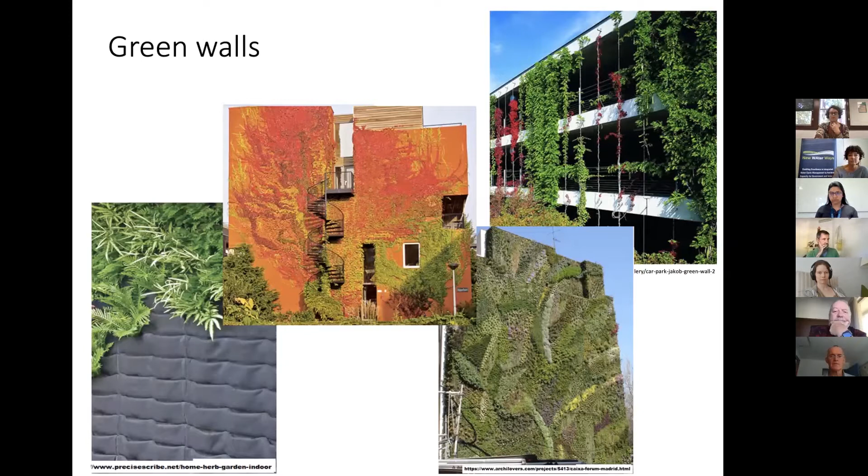And then there's a question of, can we irrigate them with greywater? So the overriding, outstanding questions that were given to us when we started this project were: how well do green walls survive in a Mediterranean climate, and can we irrigate them with greywater?

If we're aiming to implement them here, irrigating green walls with greywater, what is the appropriate media? What are suitable species of plants? What's a suitable design? Some of the images I just showed you were actually attached to the building wall, and some were not attached, like in the photograph shown here. So what's the best design?

What are the irrigation requirements? What are the water requirements of the plants? What's their ability to remove pollutants that might be in the greywater? What are the maintenance costs, and can we reuse the outflow? Is there sufficient volume and water quality to have some beneficial use for the outflows, or is it better to have no outflows at all? So there are some questions there.

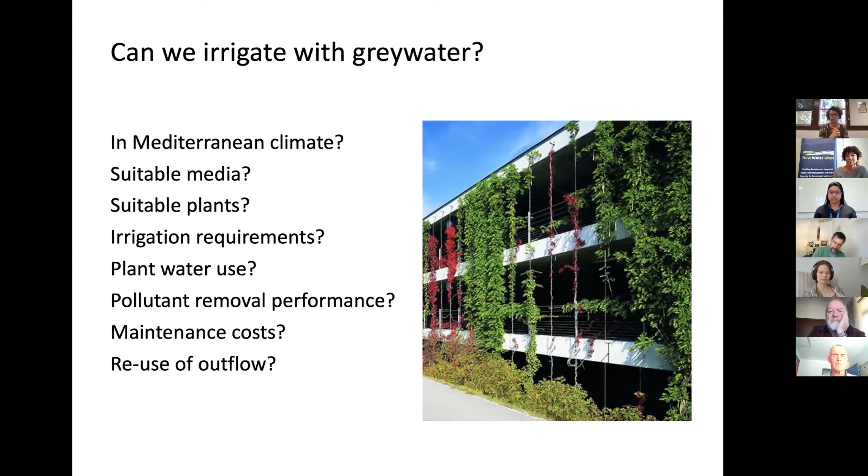Azrina and Reza, today we don't have a lot of time, so they will touch on some of these. We don't have time to go over all of them today. In addition to the design and water use of green walls, there are also some key questions around thermal comfort.

What is the temperature reduction behind the planters or behind the green walls? Are the green walls simply providing shade that could maybe be provided by shade cloth, or is the plant somehow intrinsically important here? What's the benefit of them?

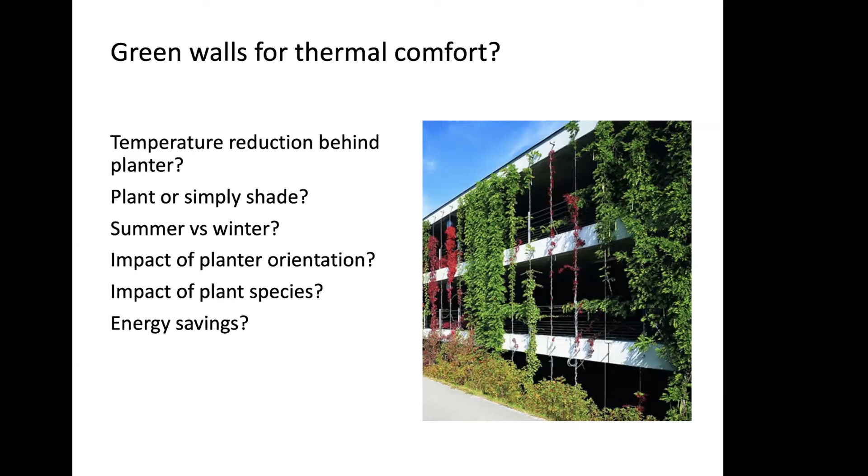What's the effect of green walls in summer versus winter on temperature benefit and thermal comfort? Is there an impact of planter orientation, meaning east facing, west facing, north or south facing? Do different species provide different thermal comfort, and what's the energy savings? So we have here a project that really spans between water and energy, and these green walls have the potential to integrate across both of those.

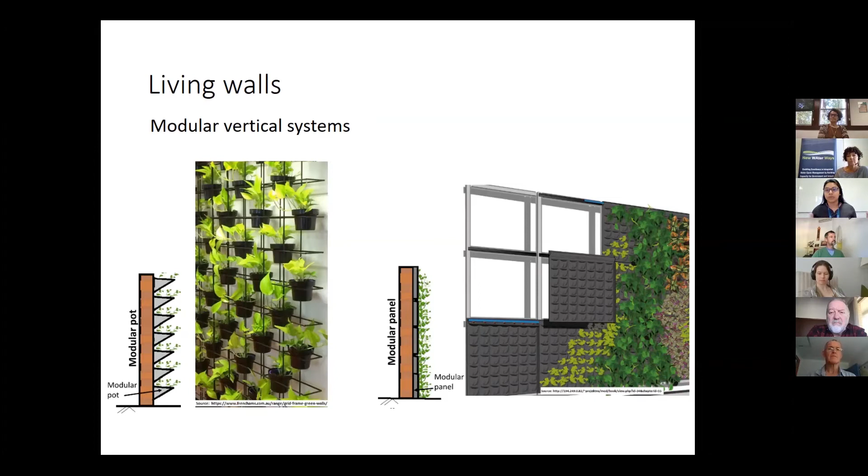Living walls are modular vertical systems where the plants are rooted on the wall itself with the help of modular pots or modular panel systems. For our project, because we need a subsurface irrigation system due to the greywater, I think the best option is the green facades.

Within green facades, there are two types: attached green facades and detached green facades. The difference is that when plants are rooted on the ground and attach themselves to the building wall, it's called attached green facades. If it uses the help of trellises or other support systems, it's called detached green facades.

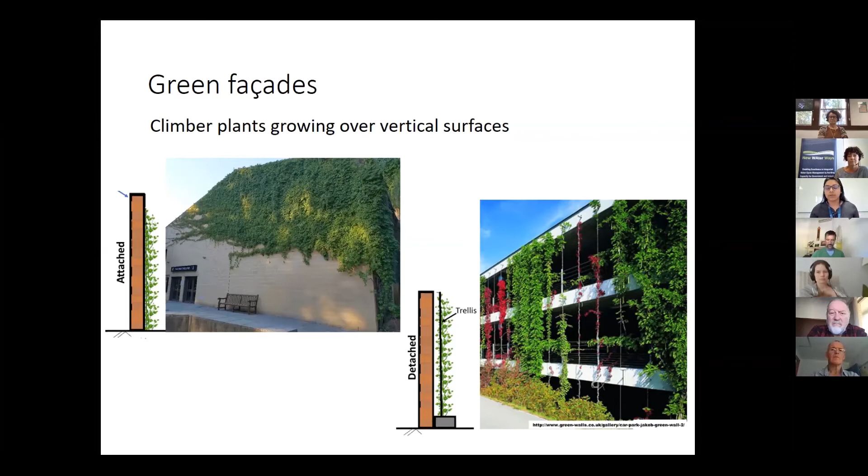Our project is about the detached green facade system. Because of the water use and the subsurface irrigation, we chose the detached green facade system.

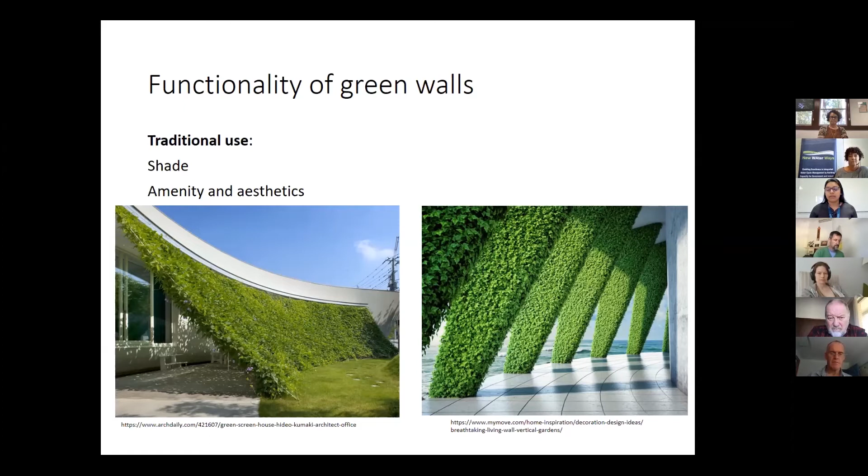Green facades or green walls in general have traditionally been used for providing shade, aesthetics, and amenity. The functional understanding of their usage is for their thermal benefits.

There is also research on green facades or green walls assessing their performance as air purifiers, their passive acoustic insulation, and their role in increasing biodiversity.

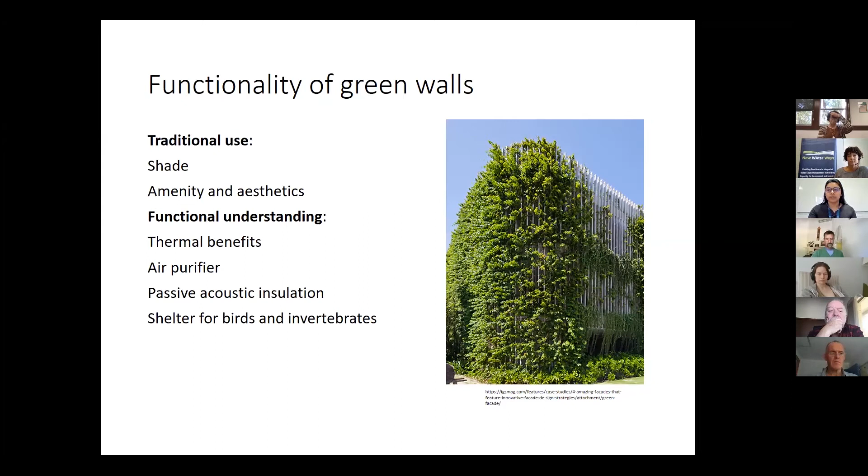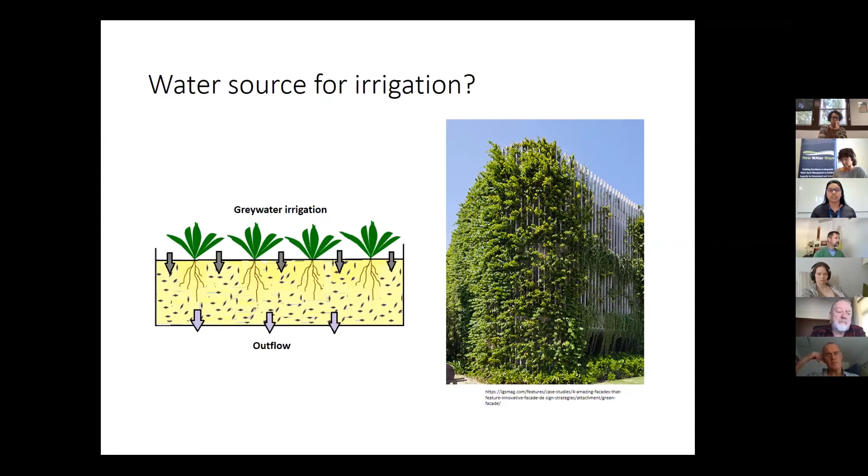But there is only a little research going on about their water pollutant removal performance. So the question here is: if we implement the green facade or green walls, what could be the potential water source? Because for plants to survive, they need water, and we have a shortage of clean water. So the question is, can we use a different water source, like greywater, because it's light wastewater in nature?

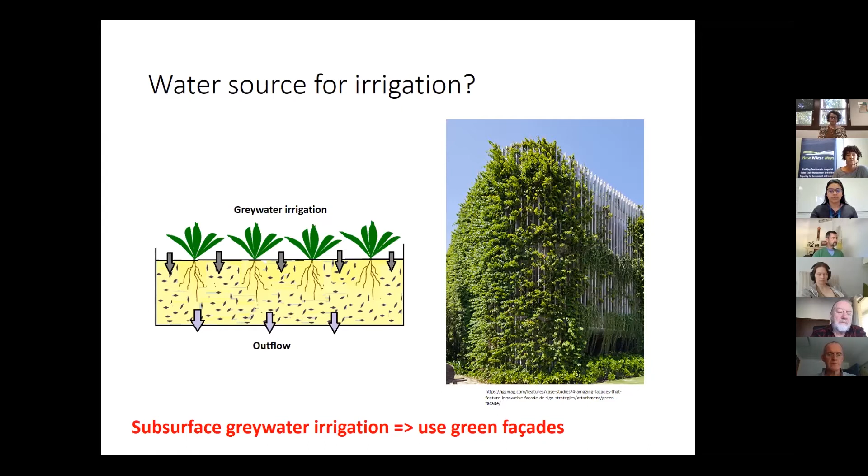So the question is, if we use that as subsurface irrigation, can we use it for green facade irrigation? Only a few studies exist on green facades irrigated with greywater. At Monash University in Melbourne, there's research on a laboratory-scale green facade that showed excellent nutrient removal performance—about 80 to 90% removal of total nitrogen, biochemical oxygen demand, and total suspended solids. But the media in that system was maintained at a water-saturated level, and Melbourne has a different, temperate climate, which differs from here in Perth.

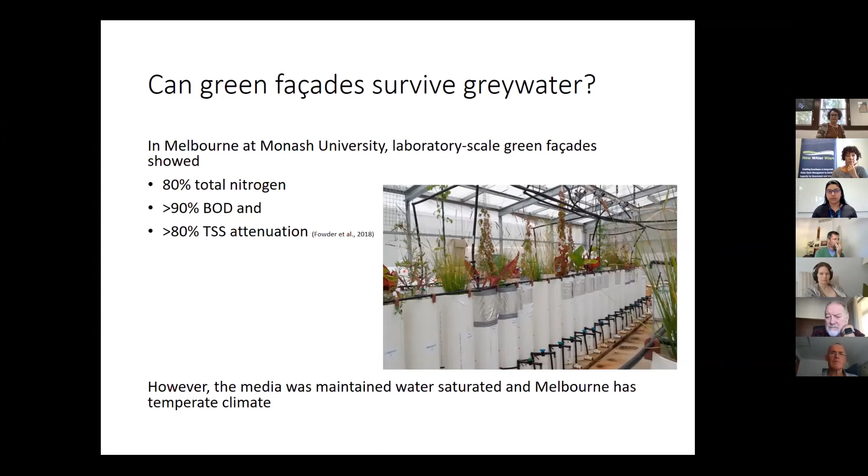So we have different knowledge gaps or questions: if we make this green facade system at a large scale outside the laboratory, can we maintain the water-saturated level? And can the plants survive in a Mediterranean climate, which has a hot, dry summer and a wet winter?

What could be a suitable media for the plants and the suitable plant species for this system if we want to implement it? Also, the seasonal water requirement—how we treat irrigation in summer versus winter, and how the plant will use the water. Also, if we have outflow generated from the green facade, how are we going to use it, or whether we want to use it at all. And lastly, the pollutant removal performance and the ongoing maintenance cost.

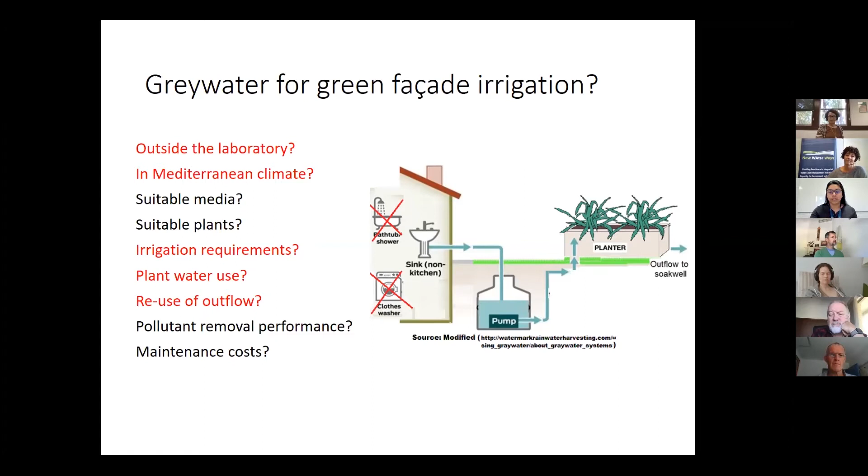We have all of these questions, and I'm still working on answering them. But for today, I'm just going to focus on the water performance of the green facade. As Shelley mentioned, this is the Bentley Primary School.

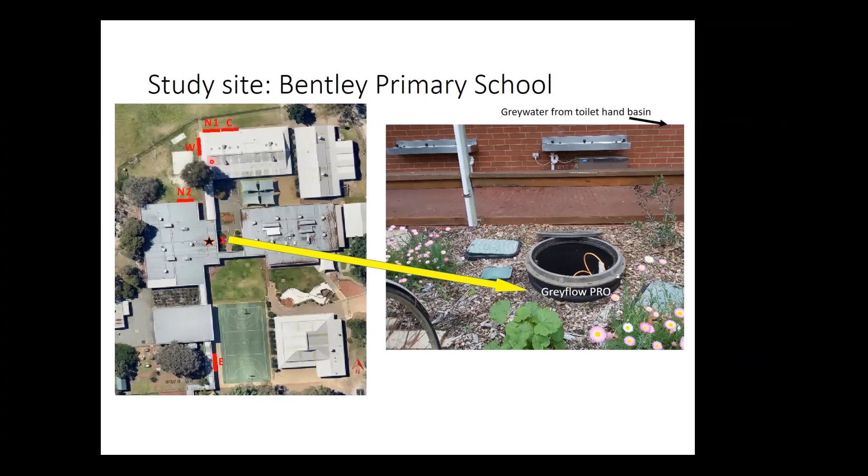These 5 red bars are showing the green facades. We have 4 green facades with plants and media, and 1 control with only the soil media, but no plant, to check how the plants are performing.

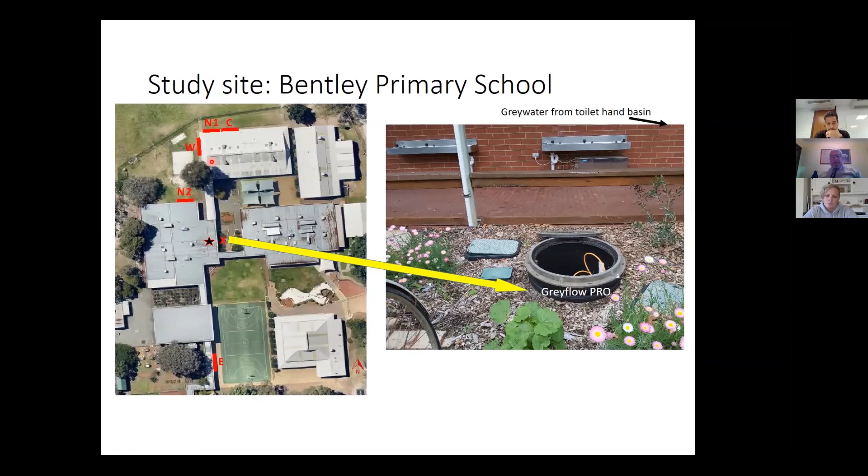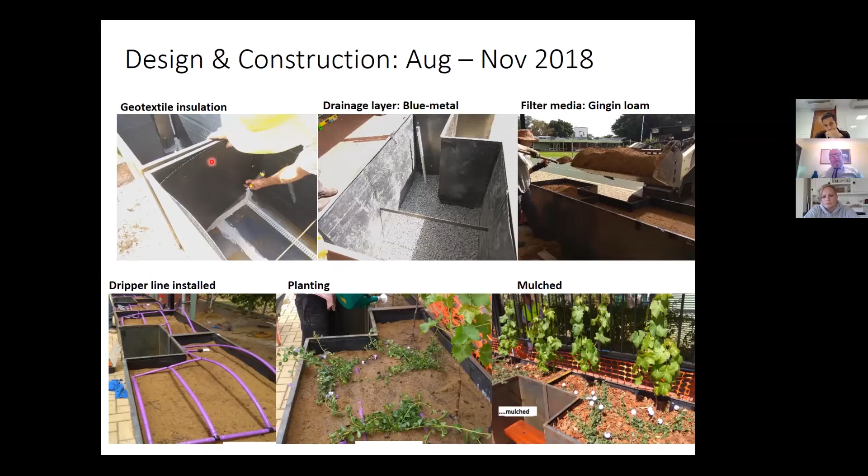Then we use Gingin loam as the growth media. We have drip lines for subsurface irrigation. We plant and then mulch to reduce the soil evaporation.

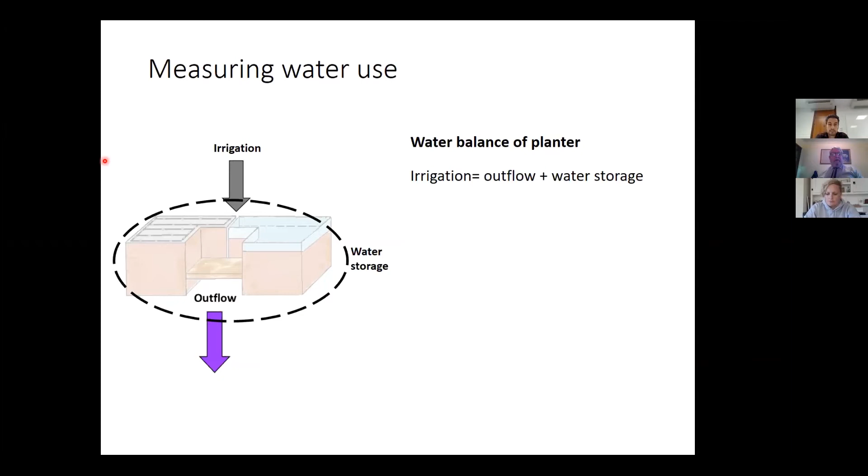So the water use, in terms of the application of the green facade, if we want to do this in real life - for the water use, I divide this in the water balance equation of the planter, which shows that when we put water as irrigation, we have outflow, and then the remaining water would be called the water storage. The water storage is stored in the soil water, and the plant can then use that as evapotranspiration - that evaporation from the soil and the transpiration from the plants.

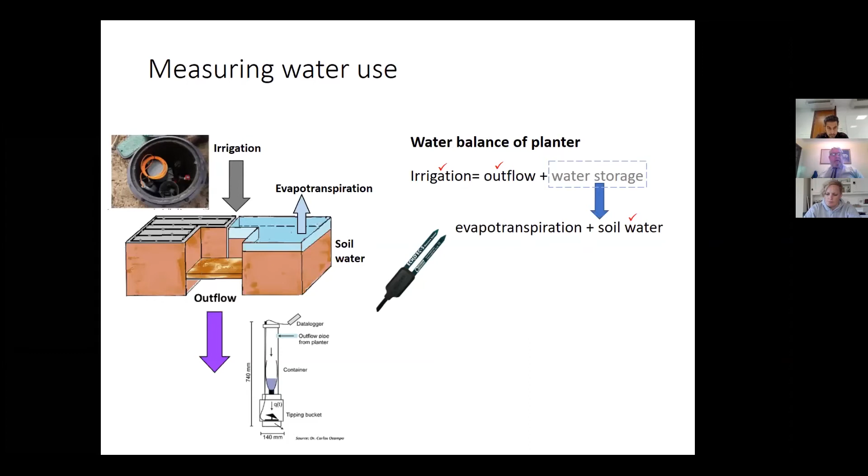We have measured this, we have been measuring this. The irrigation is measured with the help of a pressure sensor inside the greywater pump.

We have outflow, and this was designed by Dr. Carlos Ocampo, with the help of a tipping bucket rain gauge, because sometimes there is no outflow, and sometimes there is 500 milliliter outflow per hour. So this huge fluctuating outflow cannot be measured with any commercial device, that's why we had to go with this hybrid technology.

And then the soil water is measured with the soil moisture sensors.

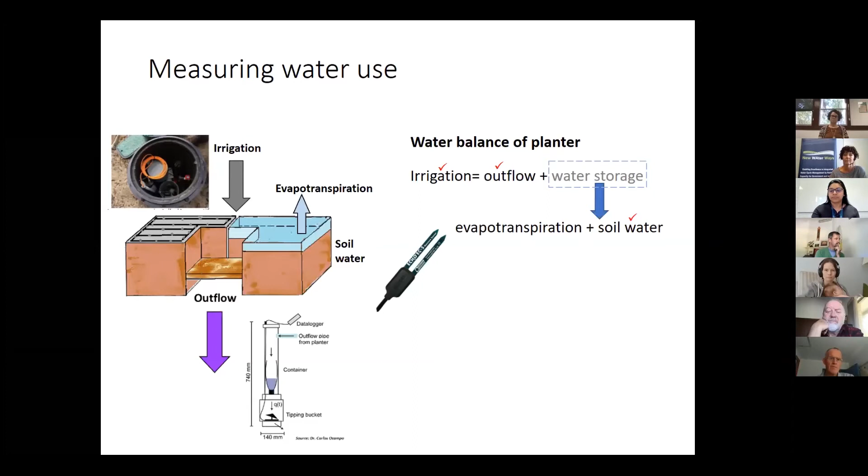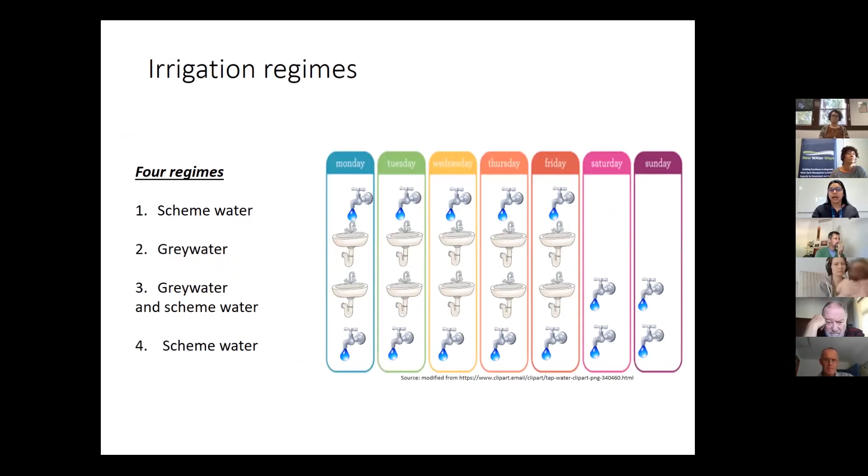For irrigation, we have tested several different irrigation regimes, depending on the weather and also depending on different type of water source, which is scheme water and grey water, and sometimes combination of both. I'm not going to explain detail about this, but we have 4 irrigation regimes, and with these 4 irrigation regimes, the planters responded differently.

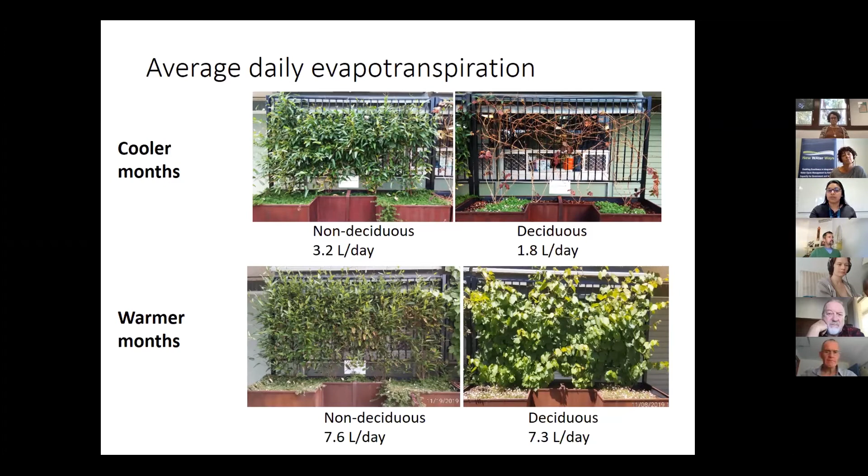In warmer months, both the non-deciduous and deciduous plants become almost similar, at 7.6 and 7.3 liters. So as soon as the leaves appear in deciduous plants, they start to transpire and use a similar amount of water compared to the non-deciduous plants.

So then I wanted to measure the plant-specific water requirement, to see which plant uses more water. When they use more water, that means they will transpire more, and this will give a cooling effect. So that was our final thought about it. We want thermal benefit from the plants, from the green facades, and also the plant that uses less water.

Because the evapotranspiration is hard to measure directly, we can measure the transpiration from the plant with the help of this portable photosynthesis device, and the evaporation from the soil can be measured with the help of this water balance equation.

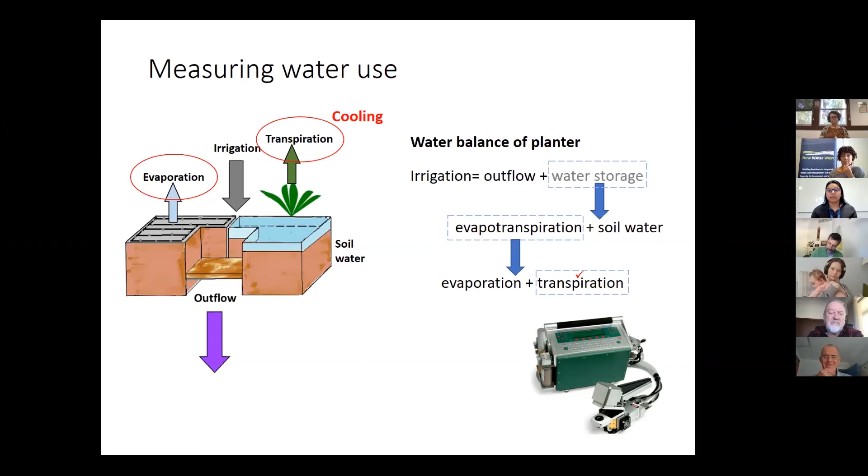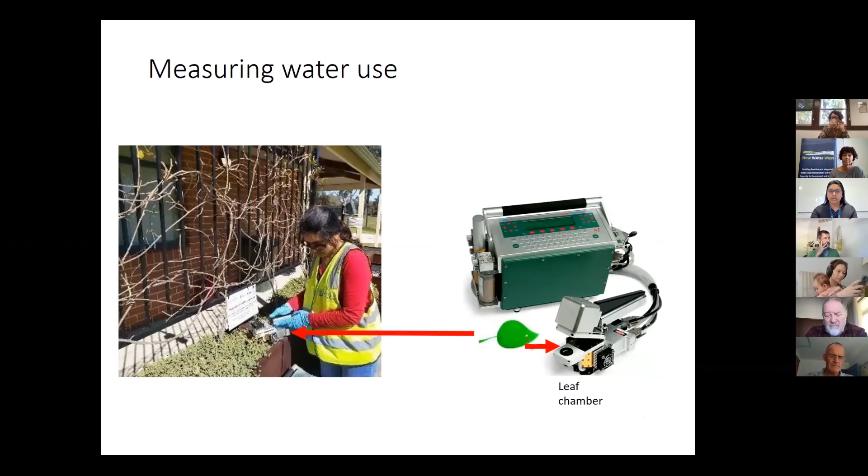So I measured the plant transpiration, which is the plant-specific water use, and this device can measure that when I put the leaf in this leaf chamber - it measures the transpiration, or the water, per unit leaf area. I measured that several times, and this data is from November 2020.

It's showing that the rate of transpiration in the west-facing planters, where we have Hibbertia as the climber and Hardenbergia as ground cover. From this figure, you can see that the blue bars, which is the Hibbertia - the water requirement of the Hibbertia is almost half of Hardenbergia, which means that Hardenbergia was transpiring twice as much compared to the Hibbertia.

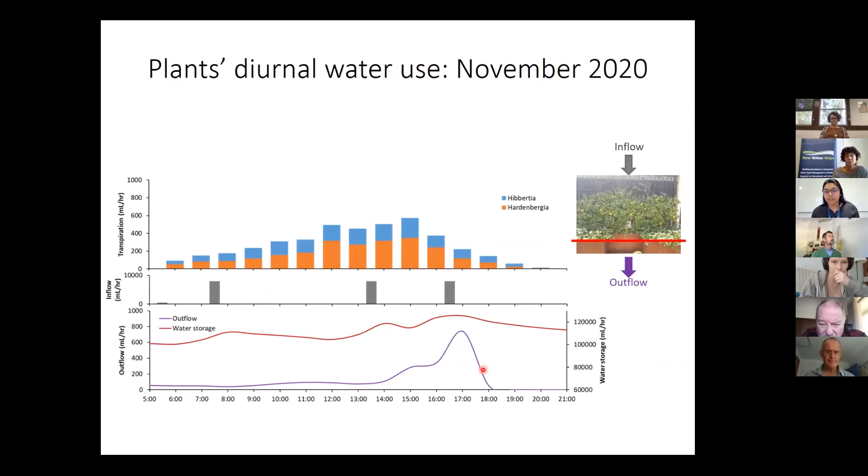If we look at the other data here, the gray bars in the second panel are showing the inflow. We have 3 times inflow on that day, starting from 5 a.m. in the morning till 9 p.m. at night, I've measured the water use of the plants. This figure at the bottom panel is showing the outflow. There was still some outflow - it was in November. We have a peak outflow at the end of the third inflow pump event.

We also measured the solar radiation to check how the plant was responding to the solar radiation, and it was measured with the help of the pyranometer.

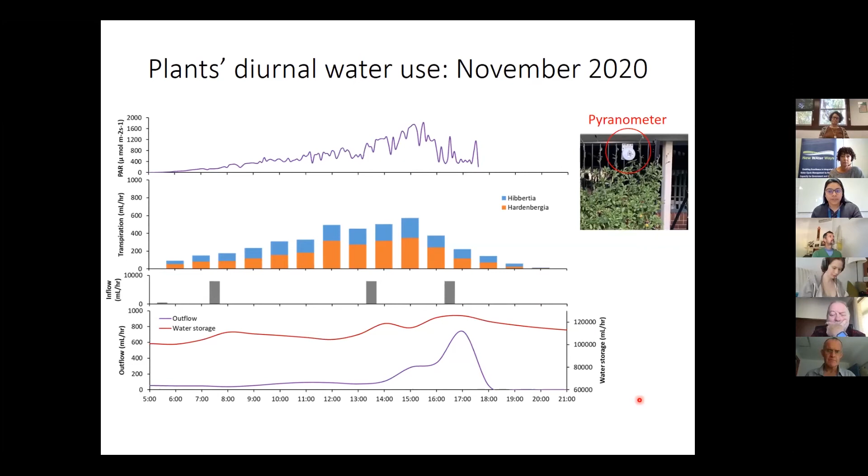The thing I'd like to highlight here is that if we look at this data, we see that the transpiration, or the plant water use, was increasing, and it increased at midday around 12 p.m. At the same time, the water storage was reducing, and that reduced to the lowest level. This means that the soil evaporation is a lot higher compared to the plant transpiration.

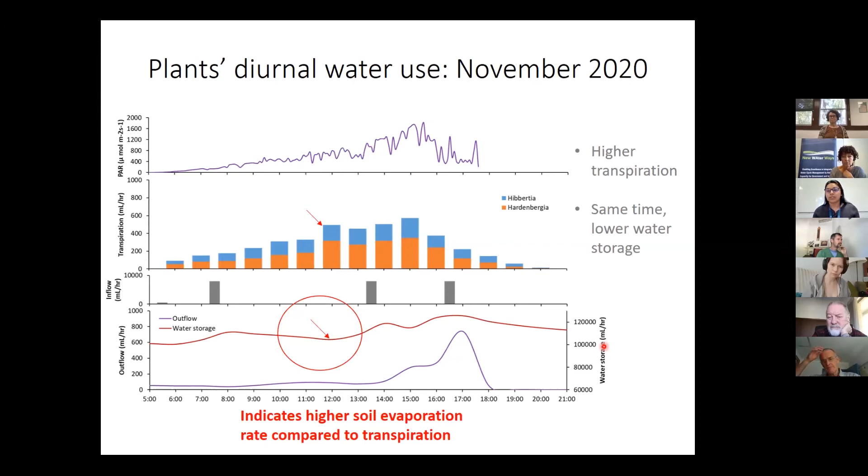If we look at the magnitude, it was just 1,000 milliliters per hour. And if we look at the water storage, which is the soil water and evapotranspiration, it's around 120,000 milliliters per hour. So this shows that the soil evaporation is way higher compared to the transpiration. The plants were using less water, but most of the water used in the planter is actually coming from the soil evaporation.

So the overall finding was that in winter, we have 5 liters of water every day used as irrigation per square meter of the planter's area, and in response to that, we have 500 ml to 4 liters of water outflow. But in summer, even if we increase the rate to 7 liters, there is almost no outflow.

And the plant-specific water requirements show that Hibbertia scandens has a lower transpiration rate compared to the Hardenbergia. And why this is important - if we want more cooling effect, we might use a plant that has a higher transpiration rate. So Hardenbergia transpires more compared to Hibbertia, and this could give us more cooling effect comparatively.

And also, because the Hardenbergia has a higher transpiration rate, it's transpiring more, so it will provide less outflow compared to Hibbertia. So that's all from my end, and now Reza would talk about the thermal performance of the green facade. Thank you.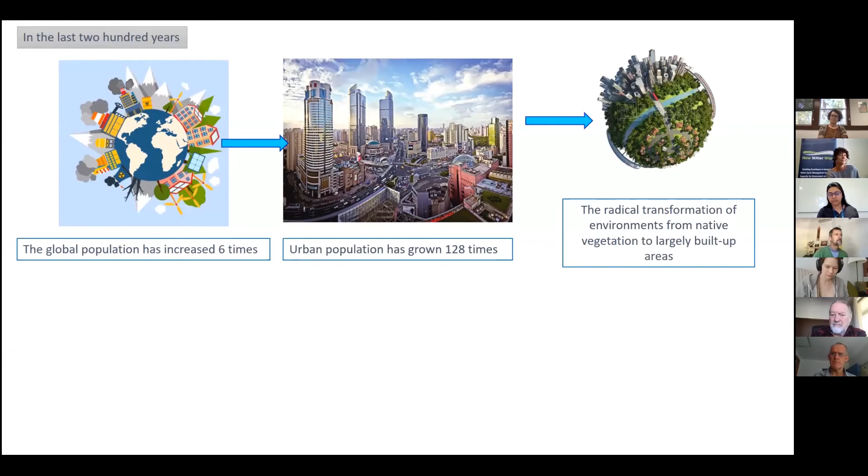In the last 200 years, the global population has increased 6 times, while at the same time the urban population has grown more than 100 times. This rapid, radical transformation of environment from native vegetation to largely built up areas causes serious environmental problems, such as air and water pollution and global warming.

Therefore, a green wall could be considered a good solution which can solve some of these problems. Green walls have both environmental and social benefits, including shading and blockage of solar radiation, evapotranspirative cooling from transpiration from the plants, and energy saving, as well as cost and environmental benefits, social and economic aspects, and psychological impacts.

The first 3 items have been considered as cooling effect, which are the main focus of this study. There is also a link between my project and Azrina's project, which is about the transpiration and evapotranspiration.

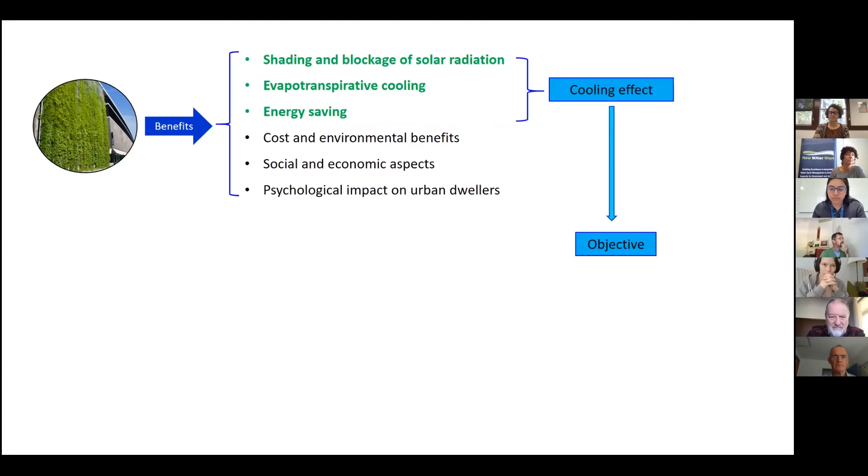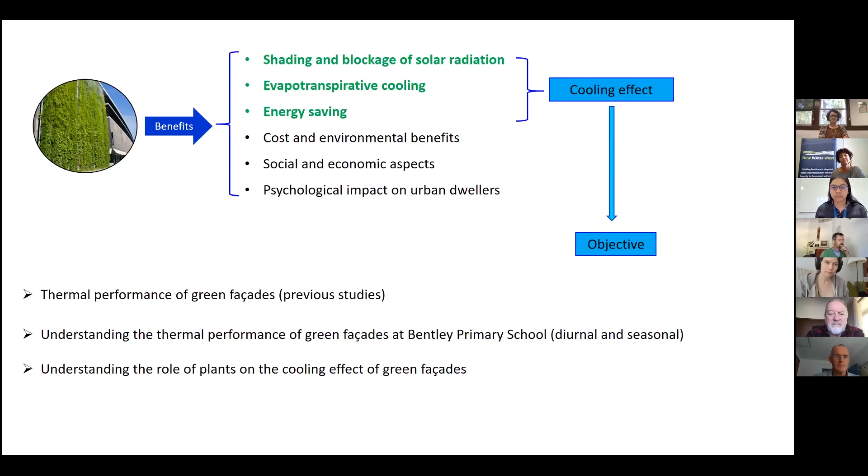The objective of this study is first reviewing and analyzing the thermal performance of green facade based on published studies. After this analysis, we can find the knowledge gaps, which are understanding the thermal performance of green facade at Bentley Primary School, and understanding the role of plants on the cooling effect of green facade.

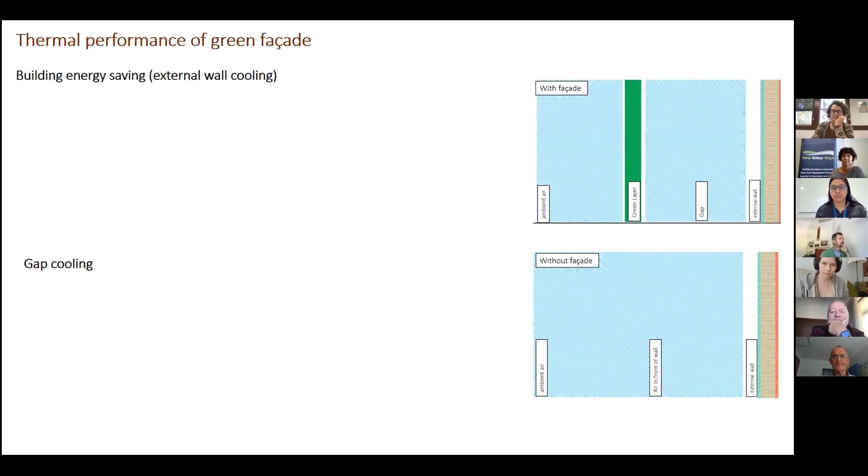Thermal performance of green facades is important in 2 different aspects. The first one is building energy saving, which is related to external wall cooling, and the other one is gap cooling. For the first one, we need to measure and compare the temperature of external walls with and without facades. Here, delta T for external wall is the temperature difference between these 2 walls.

Negative delta T means that external wall temperature with facade is lower than without facade, which is considered external wall cooling. On the other hand, positive delta T means that the external wall temperature with facade recorded higher temperature than without facade, which is considered external wall warming.

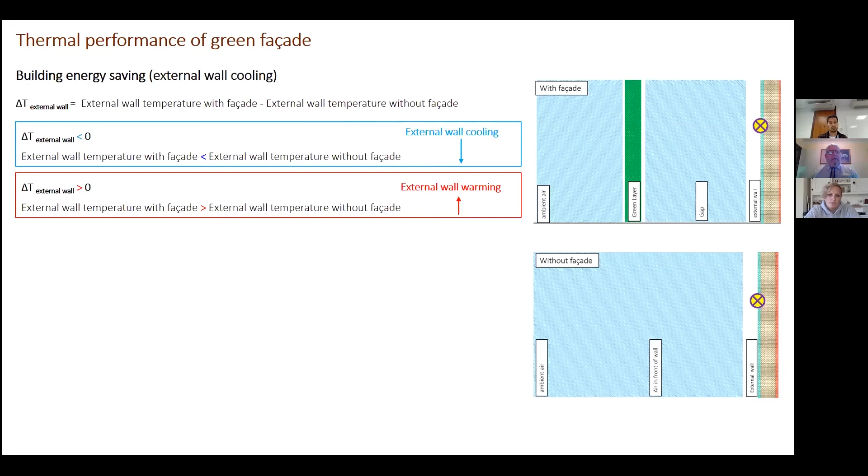For gap cooling, we need to measure and compare the temperature of the area in front and behind the green layer. Here, delta T gap is the temperature difference between ambient air and gap temperature. Again, negative delta T is considered gap cooling, meaning the gap has lower temperature than ambient air, while positive means the gap recorded temperature more than ambient air and is considered gap warming.

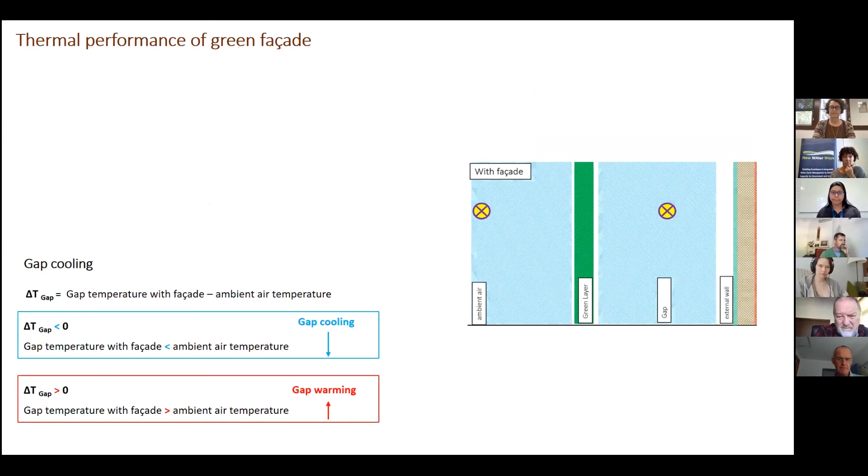After analyzing and reviewing temperature from published data, which were more than 30 papers with about 900 hours of temperature data, we understood that green facades and green walls have been used in different countries with a huge range of temperature classification from hot to cold, with a minimum and maximum temperature of -6 and 42 degrees.

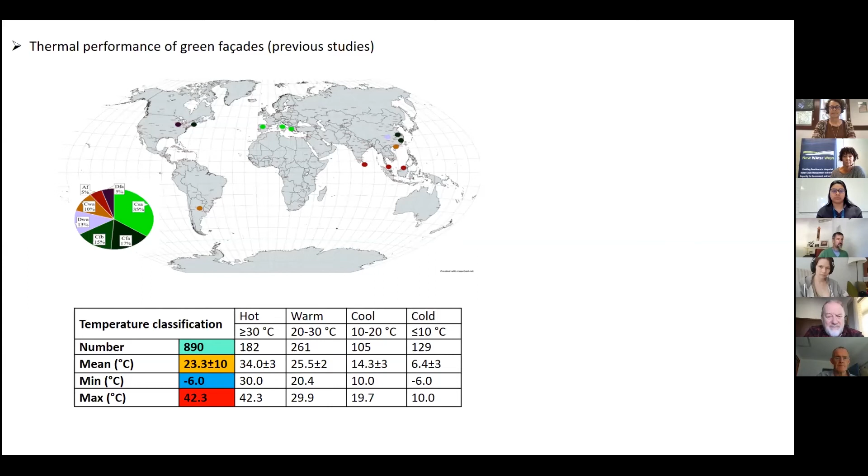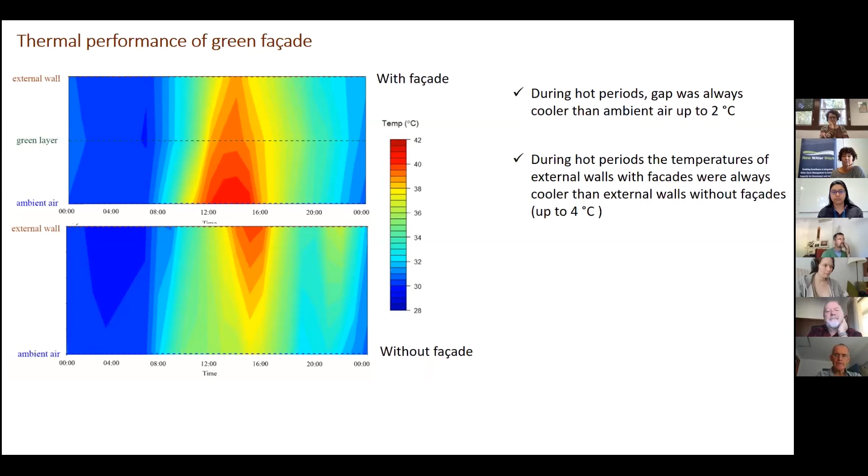Now going to our project at Bentley Primary School. For this presentation, I've selected the north-facing planter during two different weather conditions, one cool and the other warm. On the right, we have the location of temperature sensors that we have in front of and behind the green layer, and also a wind sensor and pyranometer for solar radiation.

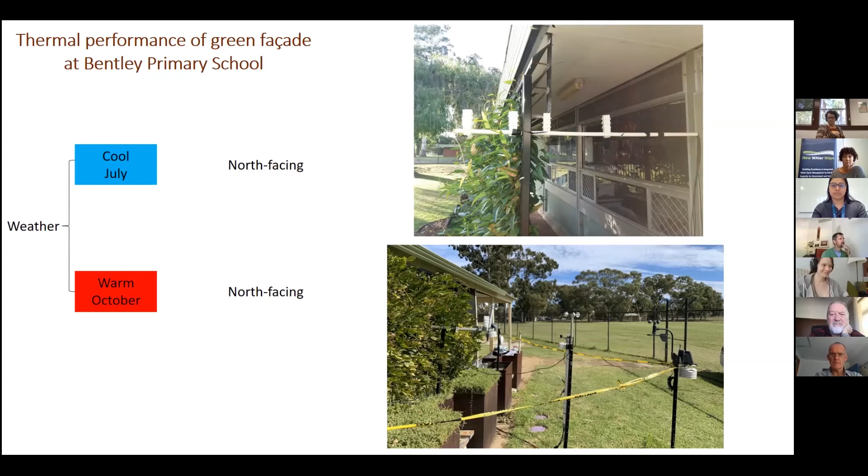First, I'm going to cover the thermal performance during the cool period on 21st of July. Again, this slide shows the heat maps of wall with and without facade. The y-axis here again is the location of temperature sensors from ambient air to external wall, which is also shown on the right figure.

We have different temperature sensors in the gap, for the temperature of the green layer, and for the external wall. Before going to the next slide and answering these questions - how does the thermal performance of green facade change over a diurnal cycle, and how does solar hour and wind exposure impact the thermal performance of green facade - by comparing these two graphs, we can easily see the temperature difference, especially on the external walls with and without facade.

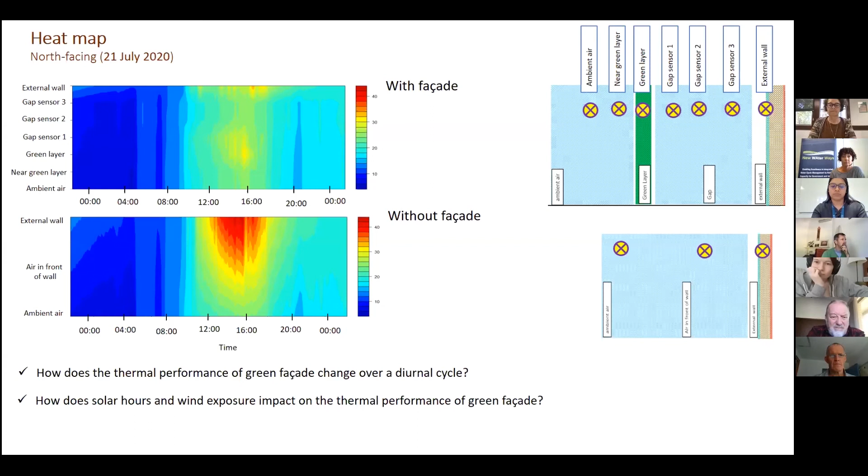This slide shows the external wall temperature profile of the same planter on the same day. The black line is the ambient air temperature, the blue line is the external wall with facade, and the dashed line is the external wall without facade.

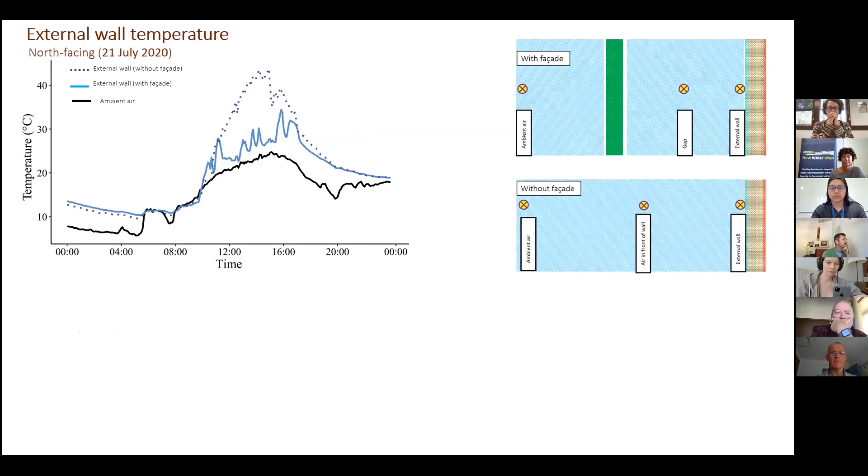The next period starts at 11 and ends at 4. During that period, which is highly affected by solar radiation, the external wall temperature of the wall without facade is about 15 degrees warmer than the wall with facade, mainly because of blockage of solar radiation and also evapotranspirative cooling. Checking the photos, we can see that during this time the external wall without facade was completely exposed to solar radiation.

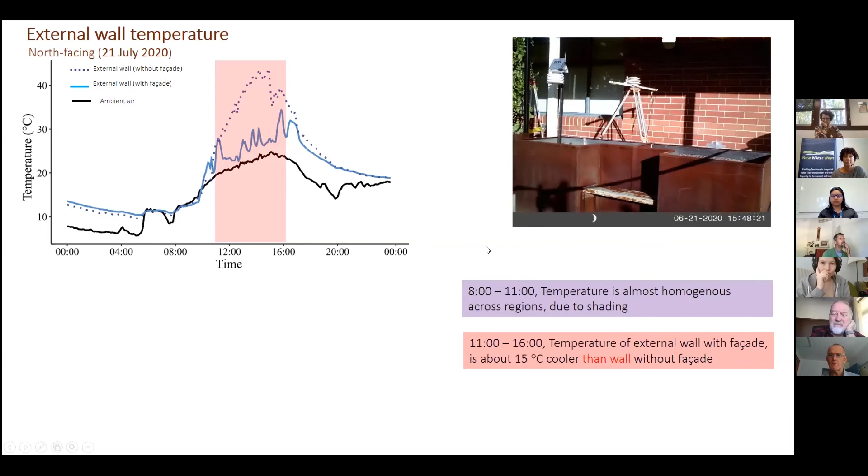Going to the next period, at night time, the external wall with facade is about 1 degree warmer than without facade. The reason is that during the day, the external wall can absorb and store heat from solar radiation and release this heat during night. Also, the green layer can act as an insulation layer and thermal buffer, trapping air inside the gap, so the external wall with facade recorded a higher temperature.

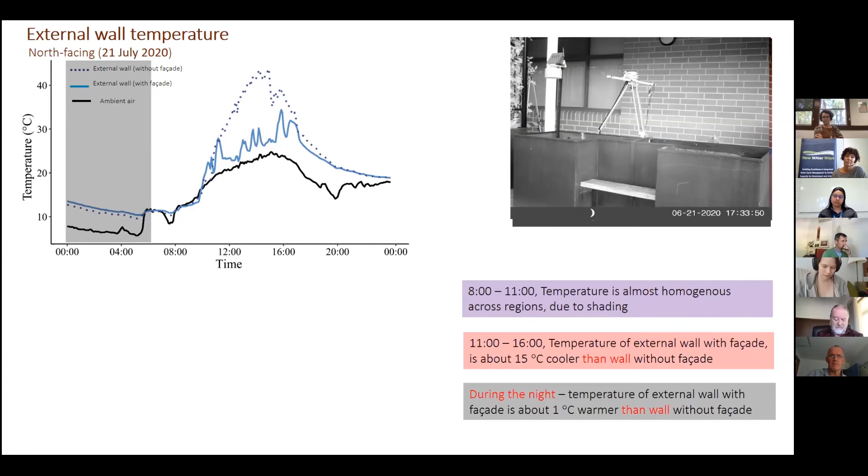Now going to the gap temperature. This slide again shows the temperature profile for the gap. The black line is the ambient air, the red line is the gap with facade, and the dotted line is the gap without facade.

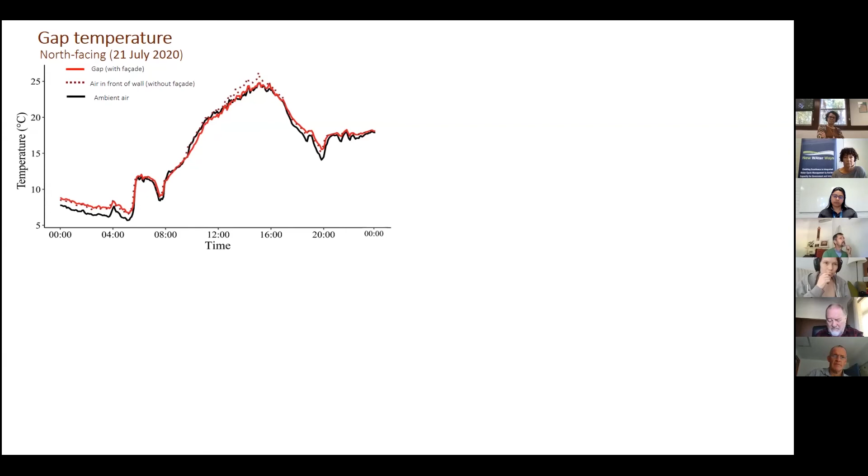During night time, again, the gap temperature with facade is about 1 degree warmer, same as the previous one, because of the warm trapped air inside the gap.

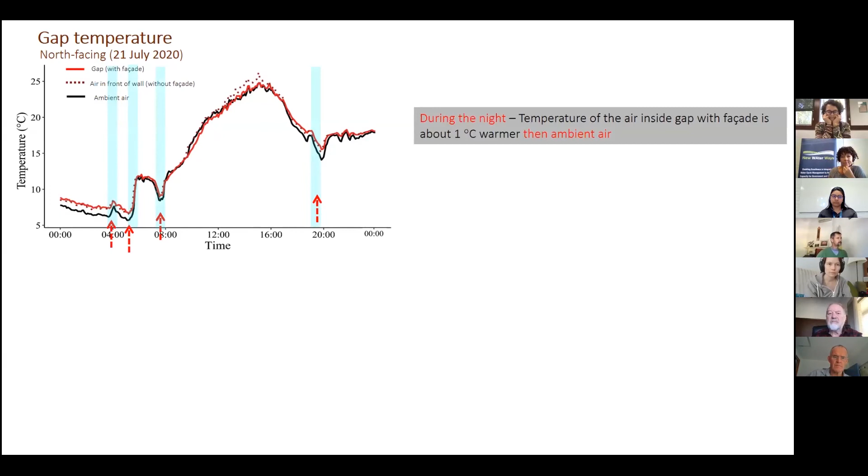Before going to the next period, by checking the temperature profile, some increases and decreases in temperature can be seen. Results from the wind sensor show that after each wind exposure, these increases and decreases happened. Wind can increase and decrease the cooling and warming effect of the green facade - during night time, wind can disturb the warm trapped air inside the gap, so the warming effect decreases. On the other hand, during daytime, wind can facilitate evapotranspiration, causing a decrease in the gap temperature.

The next period, affected by solar radiation, is during midday, from 11 a.m. to 4 p.m. During that time, the temperature of the gap with facade is about 1 degree cooler than the ambient air.

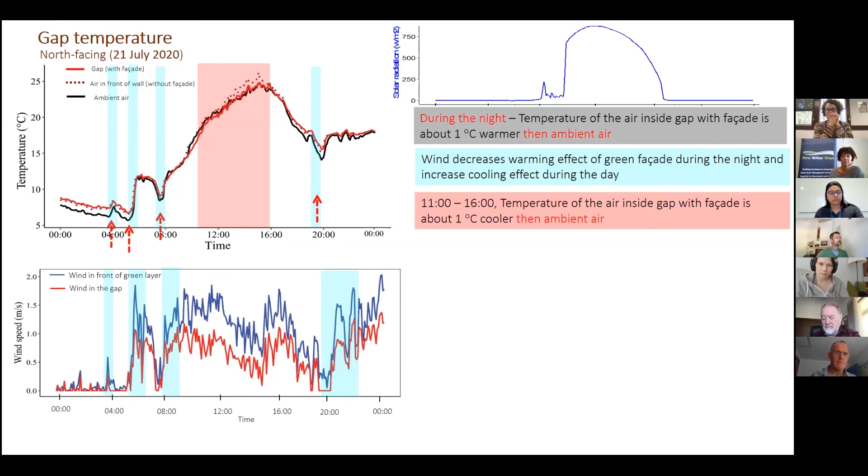Now going to the warm period on the 29th of October. Again we have here the heat maps of the wall with and without facade, showing the temperature difference between ambient air and the gap, and the external walls with and without facade.

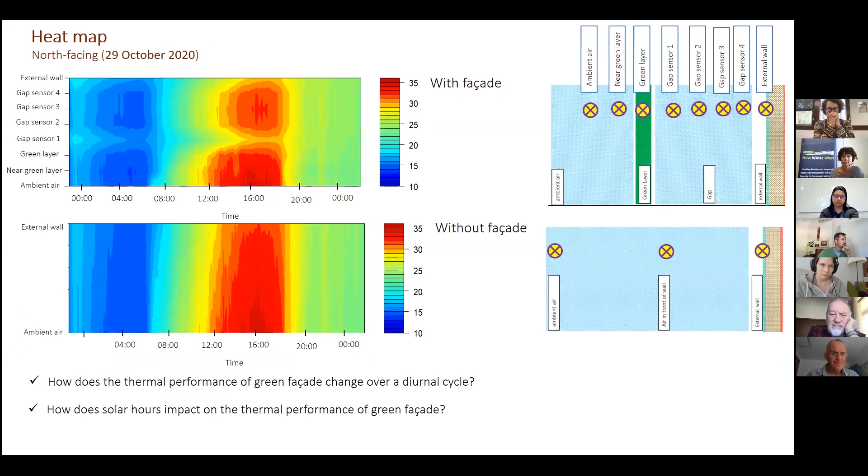Here again we have the temperature profile of the north-facing planter during the warm period. During this period, between 8 and 4 p.m., the temperature of external walls and gaps with facade are about 4 degrees cooler than ambient air and external walls without facade. During night, when the temperature is less than 20 and around 15, the temperature of the external wall with facade is about 2 degrees warmer than without facade, and the gap is about 1 degree warmer than ambient air.

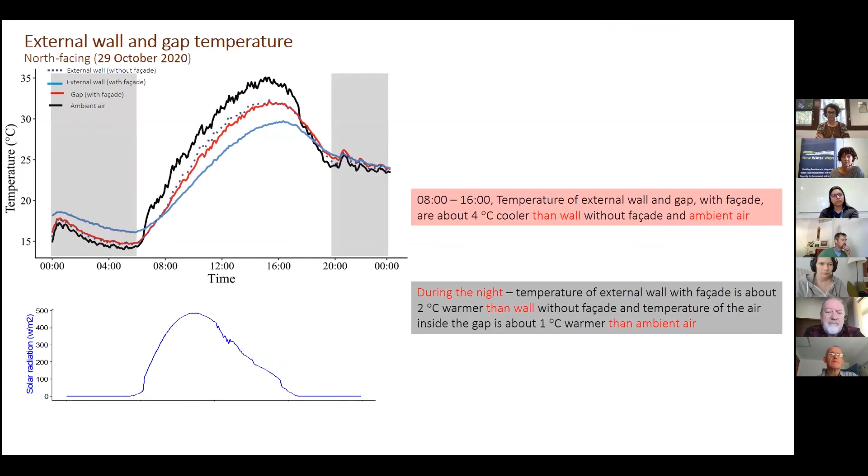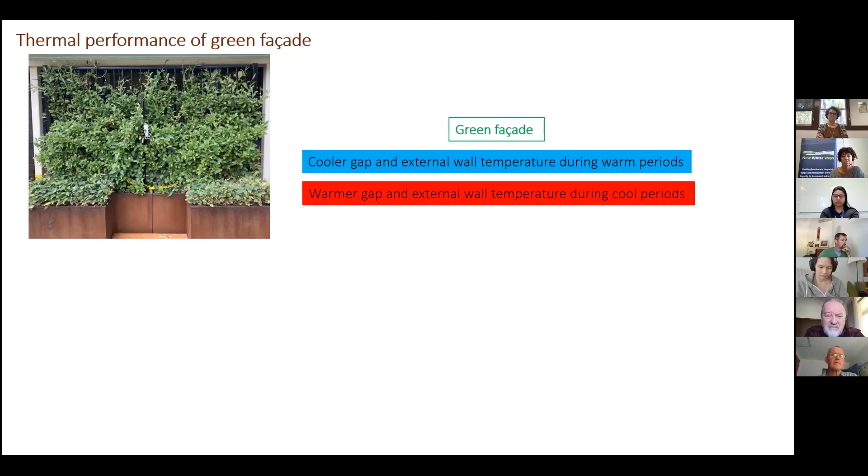From previous slides, we understood that green facade can provide both cooling and warming effects based on weather conditions. But there is a question: if we replace the green layer with a shade sail, is there any difference in temperature behavior and thermal performance of this kind of facade? In order to answer this question, we need to do a new experiment, which I've done recently.

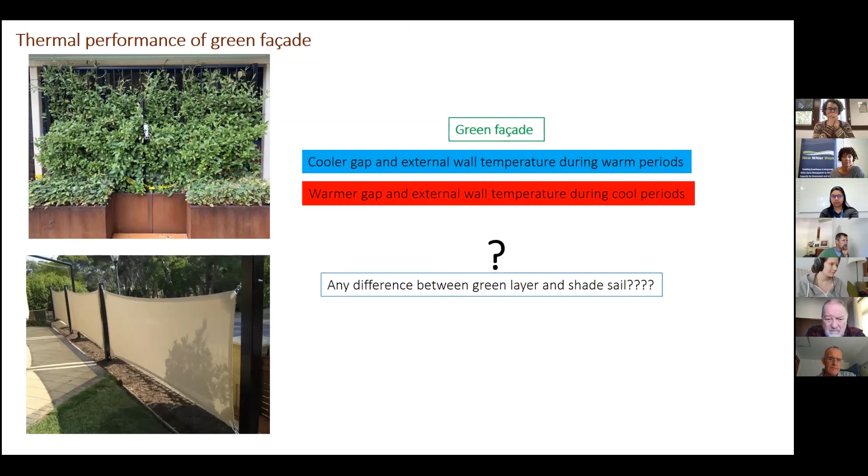So I put a shade sail close to the planter as a shading facade. Now we have a green facade, a shading facade, and a planter without facade. The shade sail can block 70% of solar radiation, same as the planter with the green facade. If you remember, I explained that the two main reasons for the cooling effect of green facades are blockage of solar radiation and evapotranspirative cooling. So by replacing the green facade with a shade sail, we can understand how much of the overall gap cooling is related to evapotranspirative cooling from the plants, and how much is related to shading.

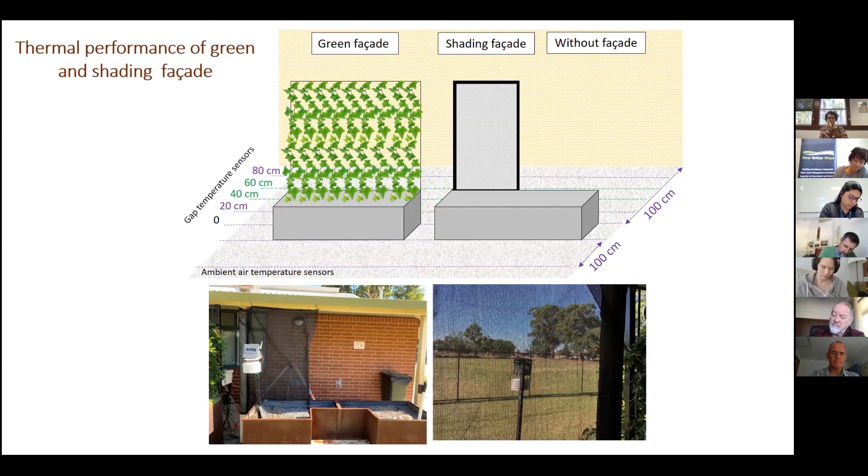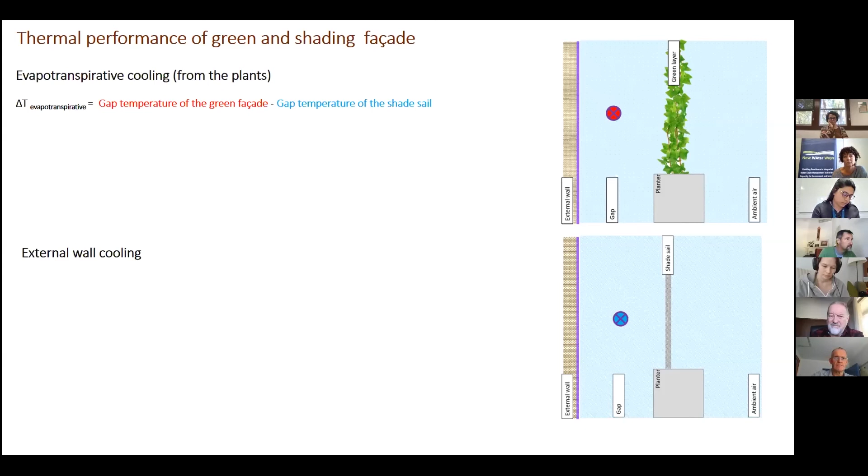We need to define some different terms, and the first one is evapotranspirative cooling, which is the temperature difference between the gap of green and shading facade. A negative delta T is considered evapotranspirative cooling, meaning the gap temperature of the green facade recorded a lower temperature than the shade sail.

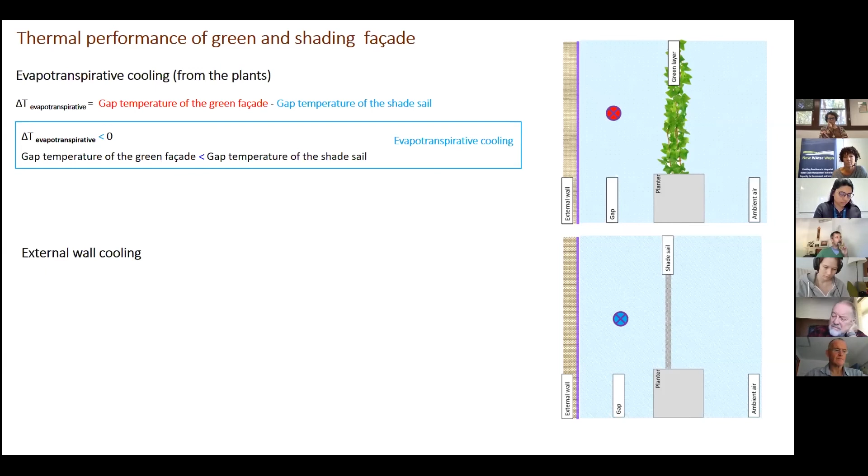For external wall, we have the same procedure: the temperature difference between external walls of the green and shading facade.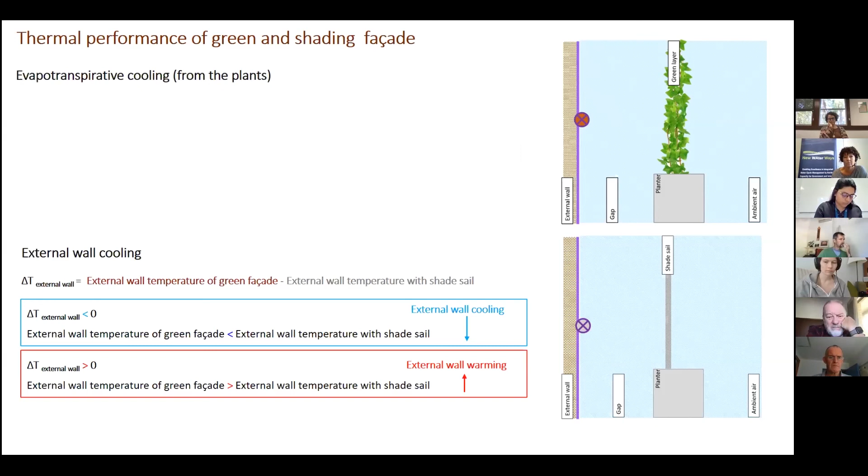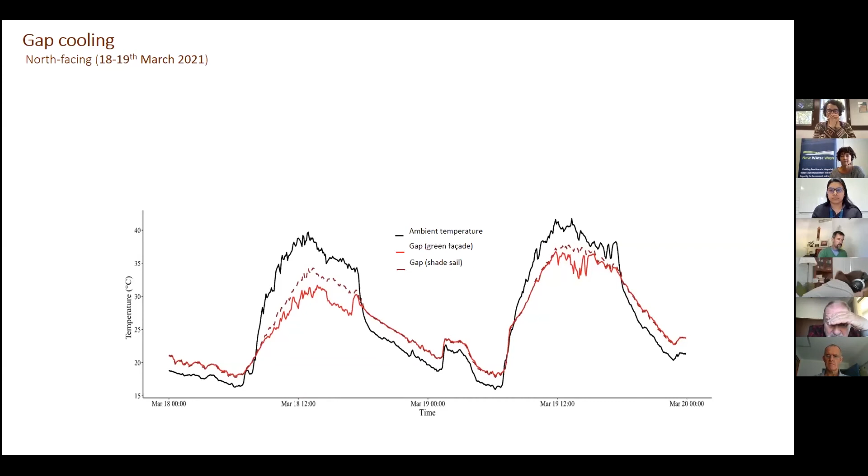Here we have the temperature profile for the gap of shading and green facade. The red line is the gap temperature of green, and the red dotted line is the gap temperature with shade sail.

During this period, affected by solar radiation, the gap temperature of the green facade is up to 5 degrees cooler than the gap temperature without facade, with shade sail, when temperatures were always more than 30 degrees. In other words, the mean contribution of evapotranspirated cooling from the plants and shading cooling to the overall gap cooling is about 40 and 60 percent.

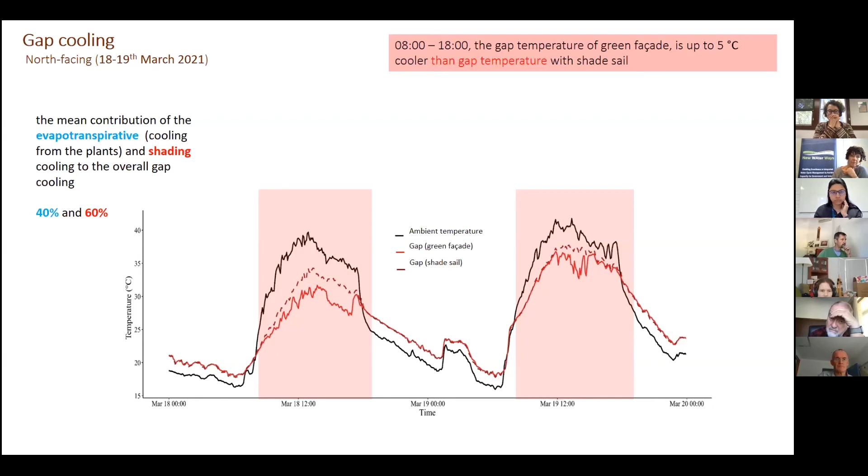For external wall cooling, for the same planters on the same day, the results show that the external wall temperature behind the green facade is up to 5 degrees cooler than the external wall temperature behind the shade sail. During nighttime, the external wall temperature behind the green facade is up to 1 degree warmer than the external wall temperature with shade sail.

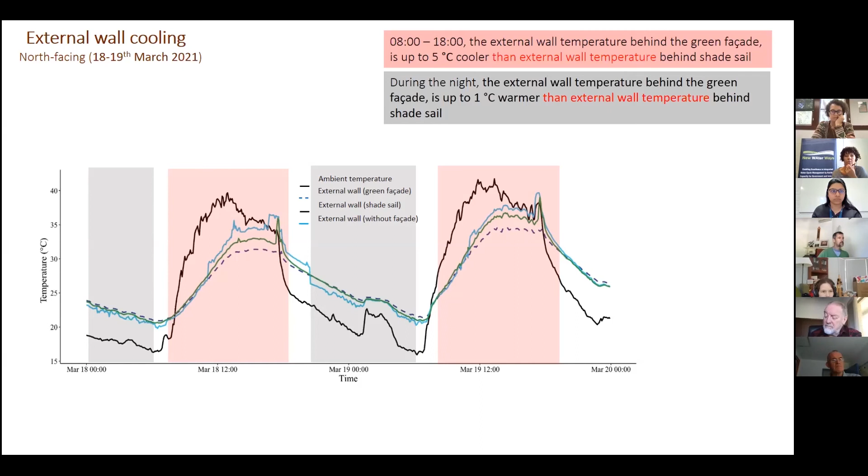As a conclusion, in terms of gap cooling: during warm weather, the gap is up to 4 degrees cooler than ambient air, and during cool weather, the gap is up to 2 degrees warmer than ambient air.

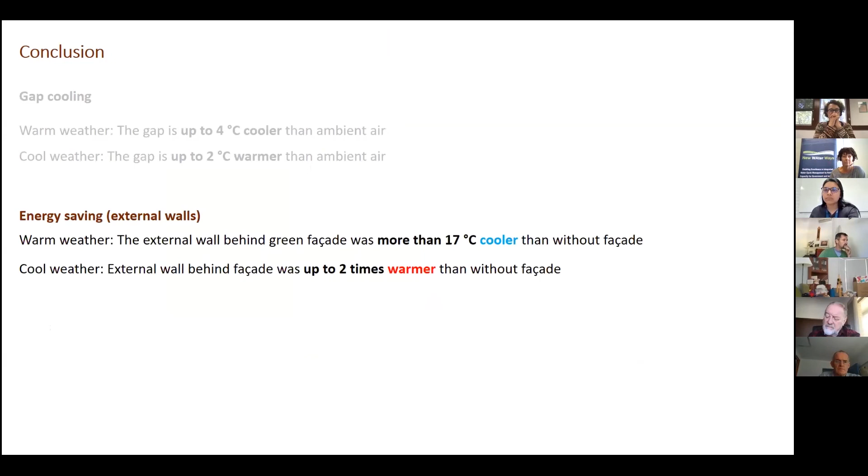In terms of energy saving and external wall cooling, during warm weather, the external wall behind the green facade was more than 17 degrees cooler than the wall without facade. During cool weather, the external wall behind the facade was up to 2 times warmer than without facade.

For the effect of shade sail, during warm weather, about 40% of the gap cooling is from evapotranspirative cooling from the plants, and 60% is from shading. The external wall behind the shade sail was significantly warmer than behind the facade.

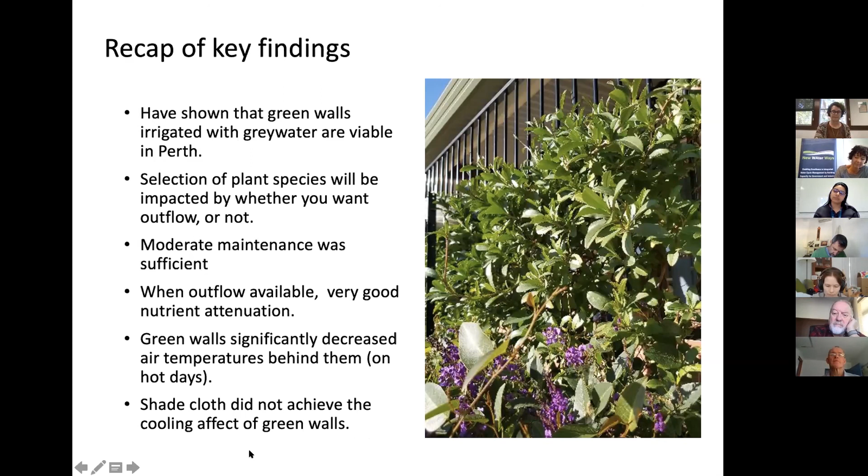Some considerations that someone needs to be thinking about moving forward, some of which we will touch on as we finish up. The work we have done at Bentley Primary School has all been done at ground level. If green walls were to be deployed on apartment blocks, on verandas or balconies, we'd want to think through the impact of the higher winds.

Reza is starting to pick that apart, and even at ground level we can start to see the effect of wind on the cooling impact, or the thermal comfort. So we can suggest what might happen if you're deploying the green walls higher and higher, which exposes them to higher winds. Of course, the plant species may also want to be carefully selected for the higher winds.

The long-term buildup of salts in the media is not really known. We still have living systems and we haven't done soil cores, but the discharge water analysis, when we do have outflow, doesn't suggest there's a long-term buildup of salts. That might be something to explore as these planters go towards the end of their life, or even in the control planter — we can probably do a soil test towards the end of this project.

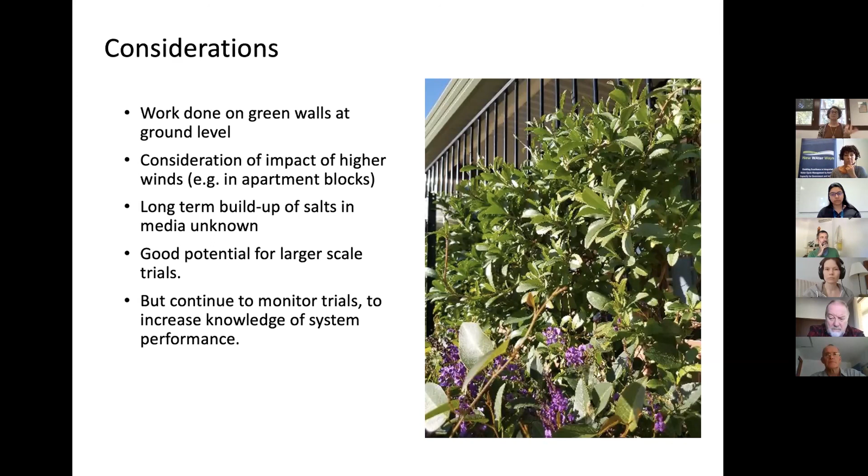I think we've shown that it's very possible to take these systems out of the laboratory and into the real world, and there's real potential for larger scale trials now. If larger scale trials are done, particularly in apartment blocks as you take them higher and more exposed to wind, I would suggest that monitoring of those would still add really valuable information to our understanding of how these systems perform and how to best design them into the future.

I just want to go back — Shelley mentioned this at the beginning, but I also wanted to stress the contributions from many agencies here. First and foremost, not just the funding but the engagement and strong support from the Department of Communities, specifically John Savell. This project would not have got off the ground without John. We've had a very strong steering group, and it's been fantastic working with them, with so many government departments represented. Everyone who was interested in this project has been there, as well as Monash University, particularly the researchers leading the laboratory scale trials, and City of Canning and Josh Byrne and Associates. It's been great having Josh involved in the conversation as well.

So I really thank all of those people. I know there's a number of people today listening who have been on that steering group, and I really appreciate their contribution over the 3 years so far.

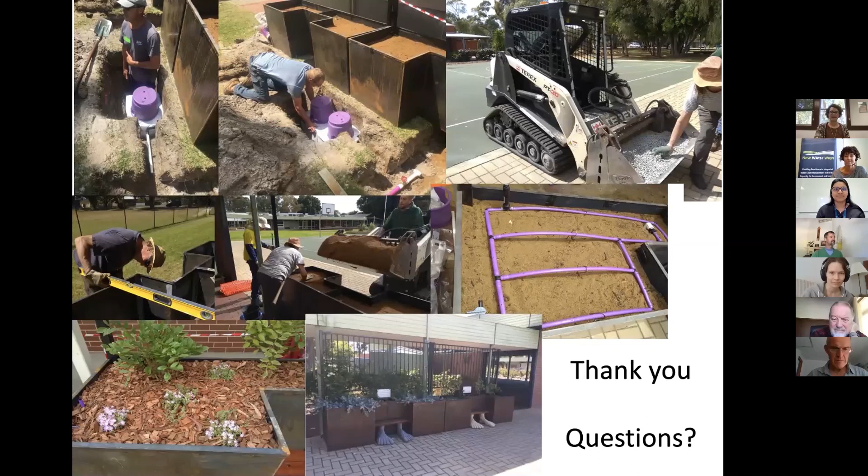That's awesome, Carolyn, thank you so much. Thank you, Azrina, thank you, Reza. They were fabulous presentations.